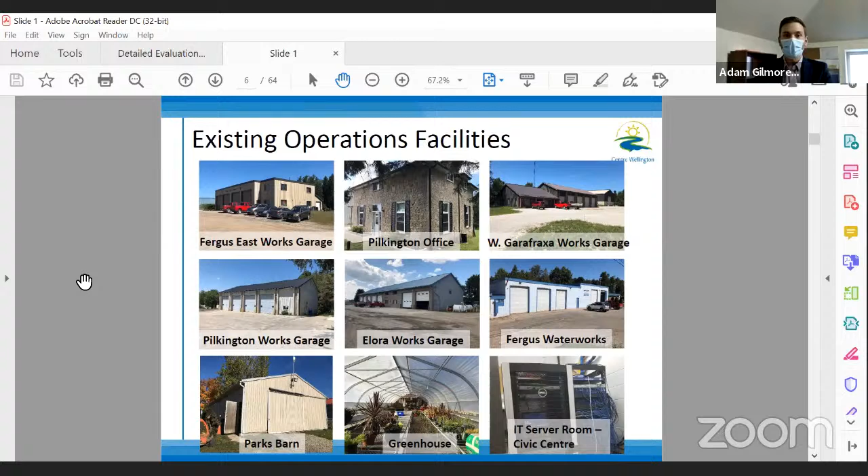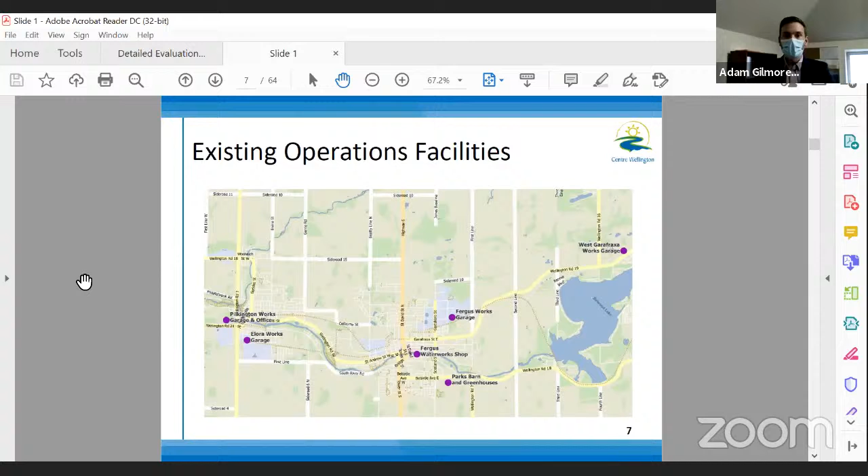So some of the current deficiencies and constraints that we have at these facilities: most of the facilities are operating over capacity, between 100 and 120% of space utilization. The current building designs, the use of space, the flow of employees and vehicles are not efficient or compliant with industry best practices and design trends.

The decentralized approach, this east-west spread, increases total facility operating costs because we have more facilities to operate and maintain. The facilities do not meet requirements under the Accessibility for Ontarians with Disabilities Act, or AODA, and they have health and safety concerns. Washrooms, change rooms, and lunch areas are inadequate for staff needs, and we have deferred maintenance and repairs such as roof replacements, garage door replacements, windows, HVAC, yard paving, security, fencing, etc. at these facilities.

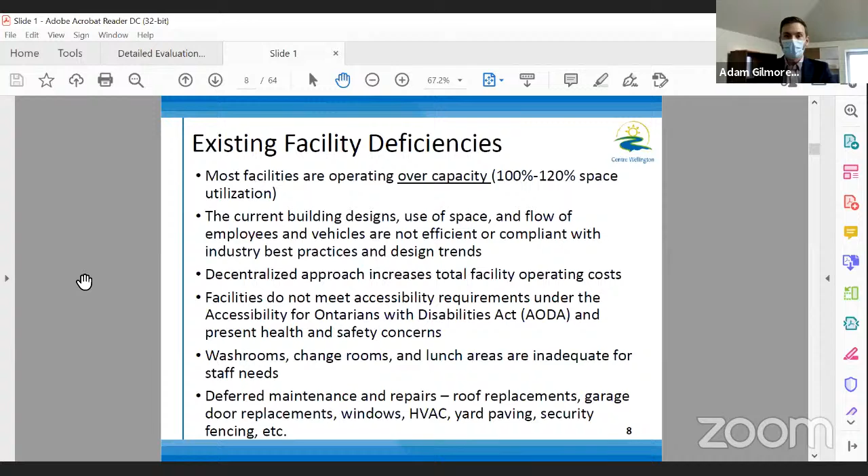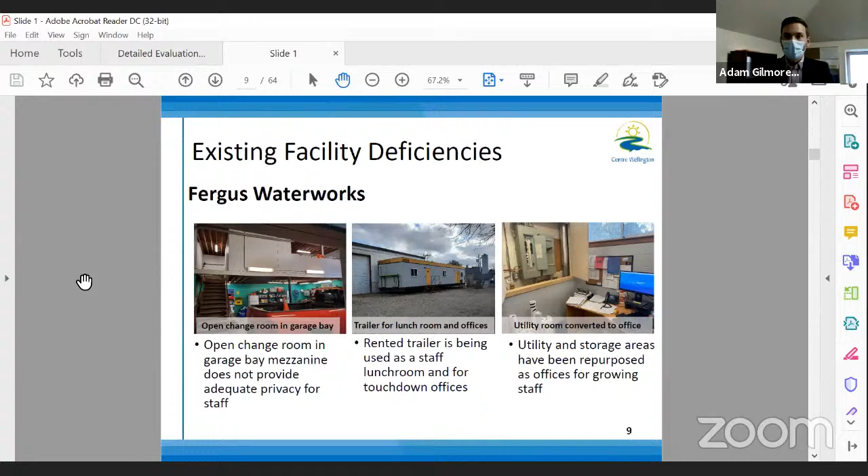I'm going to go through each of the facilities here and highlight some of the deficiencies at each of them. So the Fergus Waterworks facility - in the first photo on the left, you can see there's an open change room area in the garage bay, an area that's been retrofitted for change rooms in a mezzanine area that does not provide adequate privacy for staff. There's a rented trailer on site being used as a lunchroom and for touchdown offices, which speaks to the overcapacity issue. Finally, you can see there's an office space here that was a utility room but has been repurposed as an office area.

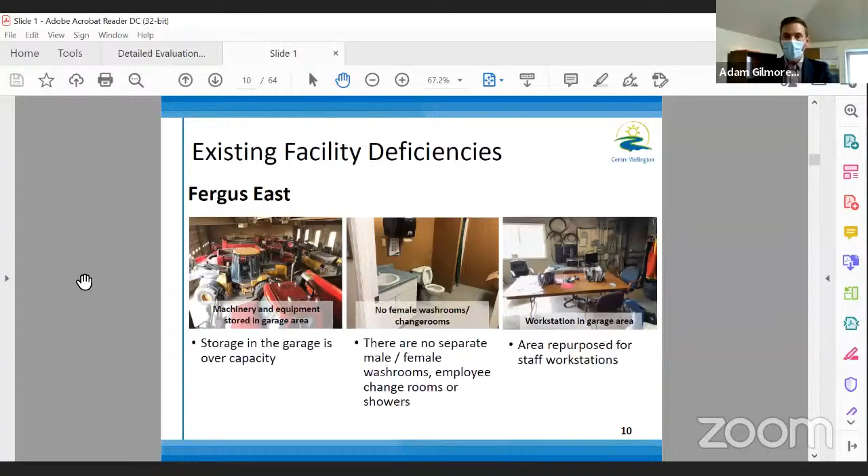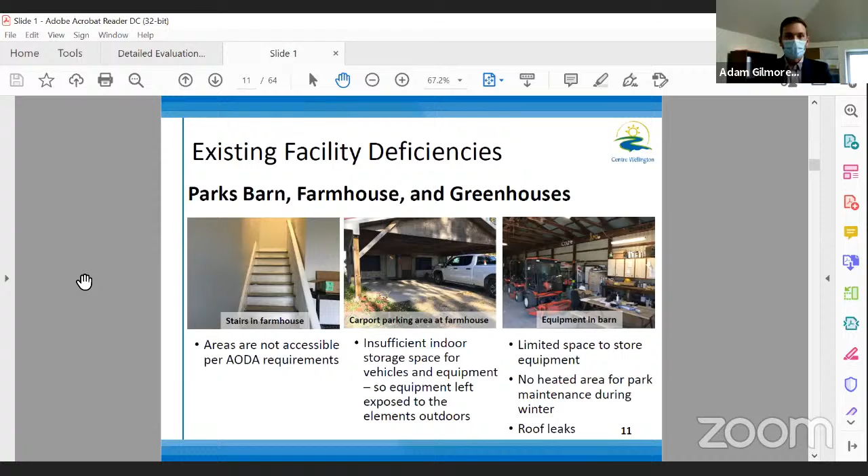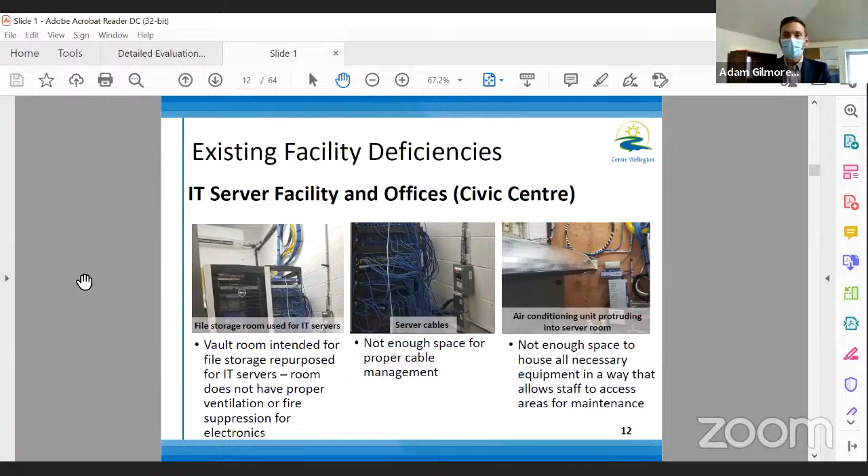Pilkington - the parking area and driveway is used for circulation of heavy equipment, but it's also used as a staff parking area. So there's a bit of a safety issue where you have staff walking across the parking area while heavy vehicles are traveling through that same area.

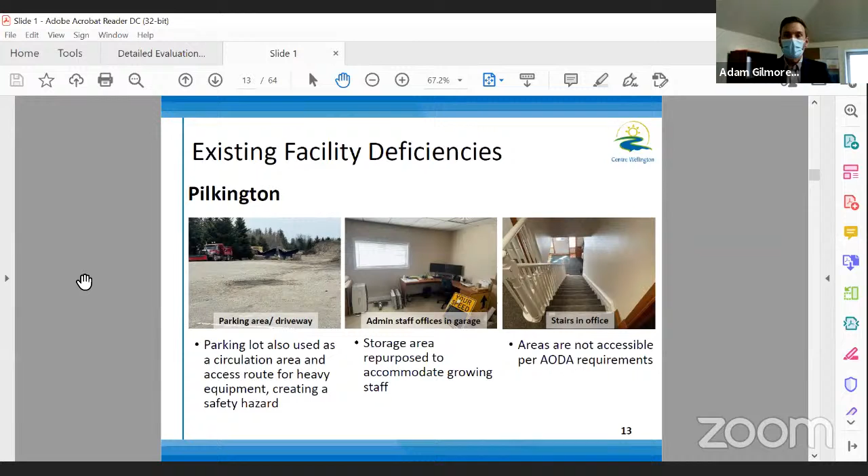Admin staff are in repurposed areas of the garage, to accommodate growing staff. Again, this is a common theme you'll see in most of the facilities: we have steep staircases, no elevator access, so not meeting AODA requirements.

In West Garafraxa, we have our file storage and archive area in the basement. It's nearing capacity, and to add additional capacity we would have to do major structural modifications to the building. You can see a staircase here, not meeting AODA, and finally a lunch area that doesn't have the required amenities for staff.

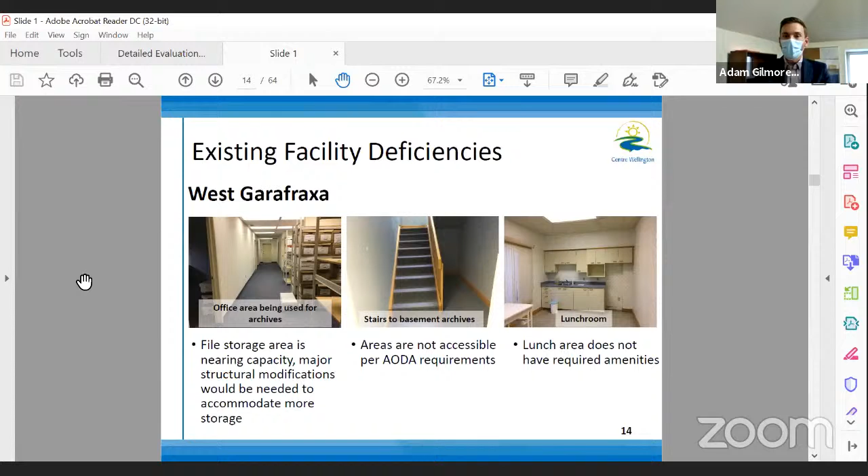In Elora, there's no proper crew meeting room, so an area has been repurposed for meetings. There's an open staff changing area, no proper male-female employee change rooms and shower facilities, and again the AODA issue.

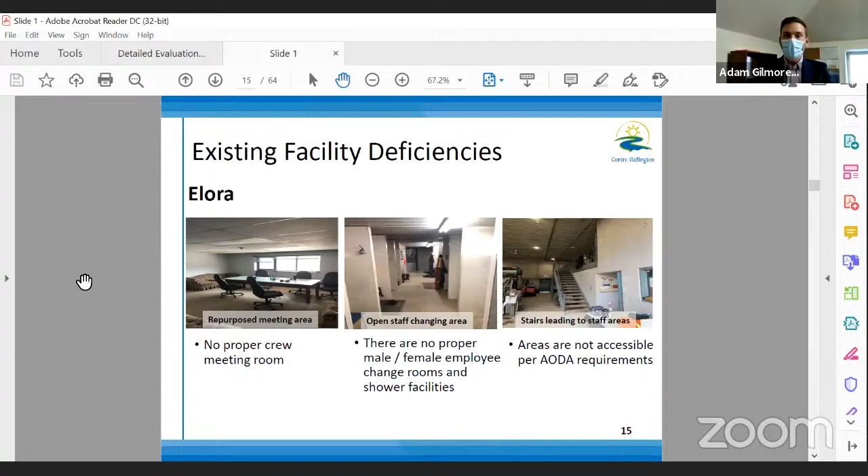To highlight how we're growing, under Wellington County's official plan we have growth targets to the 2041 timeframe. We're going to grow our population and employment by approximately 30,000 over the next 20 years. So we're going to need more staff, vehicles, and equipment to maintain our current levels of service for that growing population.

So the key point to summarize: current facilities are over capacity, not efficient or compliant with industry regulatory standards, and inadequate for staff needs. They're also costly to operate and maintain.

So I'm going to turn it back over to Colin to walk us through some of the history related to planning for an operations center.

Great, thanks Adam. So post-amalgamation, the township inherited a number of operations facilities. This included the ones Adam has shown in Fergus, Elora, Pilkington, West Garafraxa, and also a garage in Nichol as well.

Post-amalgamation, there was a study commissioned by the township that looked at a number of issues, including staffing, resource allocation, and also facilities. In terms of the operations facilities, the report recommended, and we've got it here in the presentation, that Centre Wellington should be aiming for a single operations depot within a 5 to 10 year horizon.

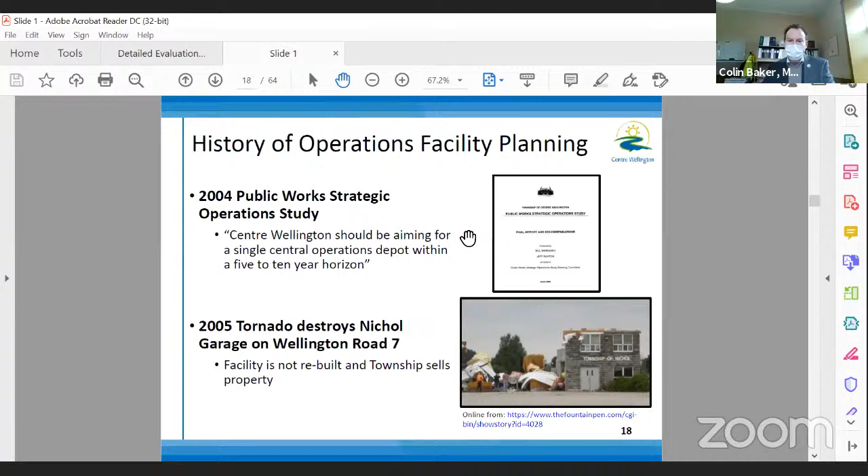In terms of capital budgeting for the operations center over the years, that centralized operations facility approach was included in various capital budgets and development charge studies over the years. And in 2018, the project budget was updated, as well as the project understanding.

Given the large geographic area of the township, it was determined at that time that satellite facilities to the west and to the east should be maintained, with a new facility centrally located in or around Fergus, specifically the Fergus garage site. This moved us from the previous approach identified in 2004, which basically said we're going to have one facility centralized, likely in Fergus, to moving from that centralized model to a decentralized model. That happened around 2018.

And so with that central hub and two satellite facilities, this decentralized model will improve efficiency of operations and significantly reduce travel times for operations and maintenance vehicles. During this time too, around 2017-2018, Parks and Recreation, outside services, information technology, and archives record storage were added to the project scope for the new operations facility.

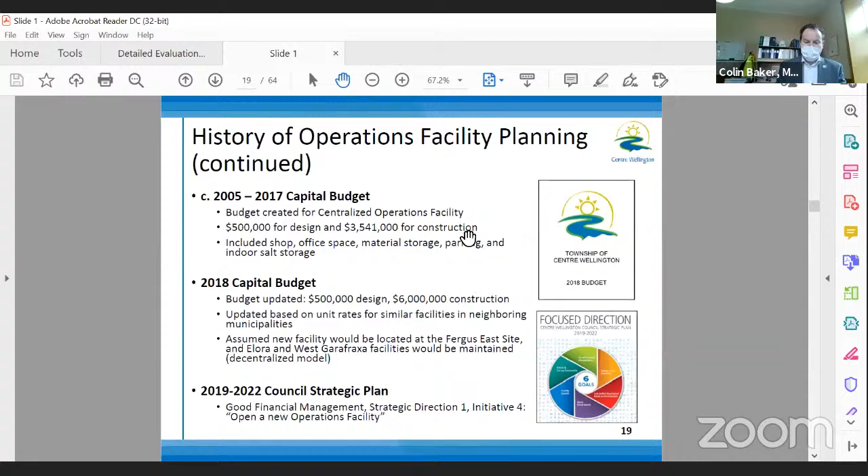Once that was passed, staff realized that we need to start moving forward with the strategic decisions related to the operations center. I've got a slide here that just shows typically what the 5 phases to a capital project are.

Really we look at a strategic phase, then a concept is usually prepared, and once the concept is prepared, we're into preliminary design, detailed design, and then construction. There are lots of steps in between or under those headings, but that's essentially the project phases. As we get closer to construction through detailed design, we're refining the project scope and getting a more accurate estimate of the budget. I'd just want to note that we're in the strategic phase still.

The strategic plan obviously provided us with clear direction, but we really need to understand how, as a network, all of our facilities will be working together, and overall what the plan will be.

We're still in this strategic phase, and I want to draw a parallel to some other studies that council would be familiar with that are similar strategic documents, like the water supply master plan, the transportation master plan, and also the asset management plan. These are bigger picture strategic documents approved by council that provide direction to staff.

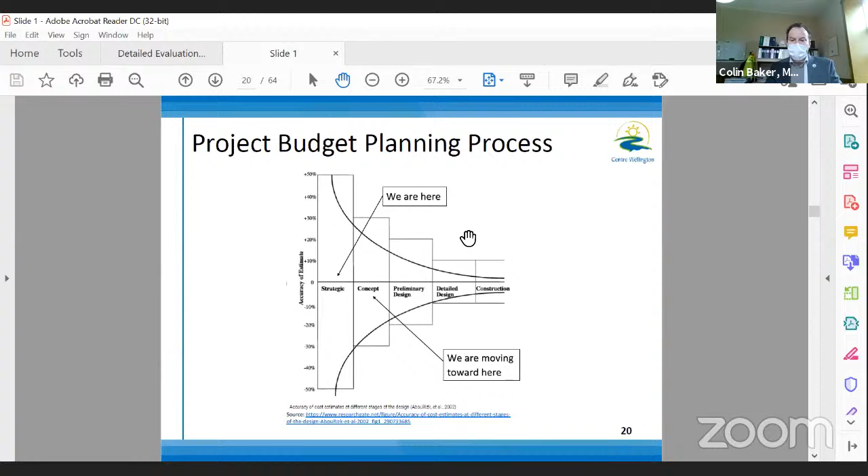On what projects to focus on, what's important to the community, and growing the community's infrastructure. So with council's strategic plan directive of opening a new operations facility, we had a lot of work to do to get to that construction phase. Staff prepared a scope of work and a request for proposals to determine operational space needs to house staff, vehicles, and equipment, materials to meet the community's needs to 2041.

Next slide. Now I'll hand it over to Stephanie and Adam. Steph will describe the project scope for the space needs assessment and concept design, and Adam will present the constraints around the Fergus garage site at 600 Glengarry.

Thanks, Colin. Yes, so we pulled together a request for proposals for the space needs assessment and concept design study, and that was issued to consultants in June 2019. That was based on some key assumptions, one of the primary ones being that we would be demolishing the existing Fergus East Works garage and using that existing site at 600 Glengarry Crescent in Fergus as the location of the new shop and offices for the project.

So we had basically earmarked Fergus East for demolition because, as we saw in some of the information Adam went through, Fergus East has several deficiencies. It does not comply with accessibility requirements. It is very overcrowded, and it's also one of our older facilities, approaching 50 years old now. Because of all of those ongoing issues with that garage, it really is nearing the end of its useful service life.

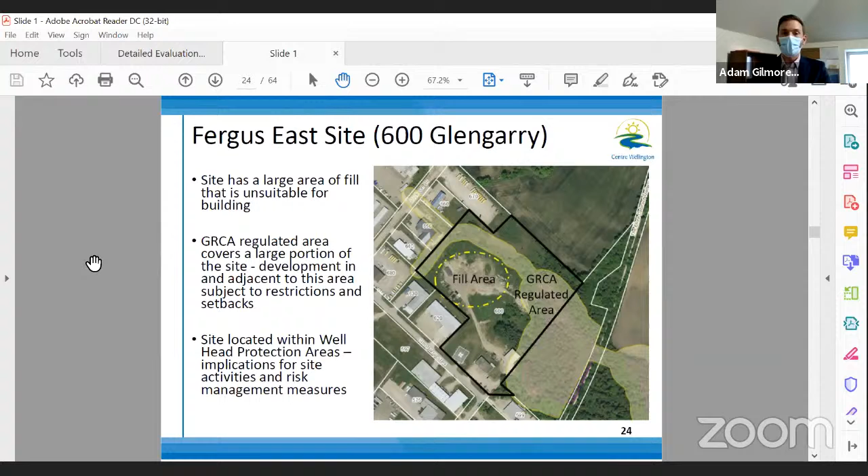So we did a very preliminary high-level conceptual layout for that site, and what we found was that the building we could fit on that site is not large enough. It will not meet our needs to 2041, and would not include a salt storage facility, pole barns, greenhouses, and other facilities we need. It would also be very expensive to construct given the need to prepare that fill area for construction.

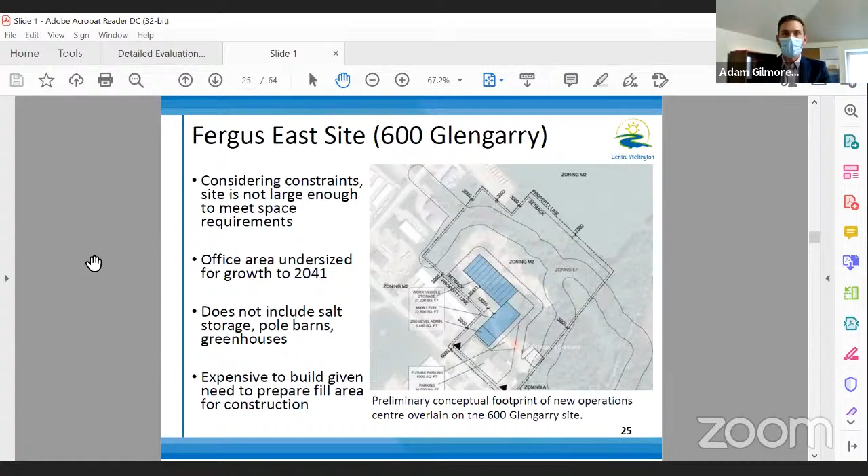Then in December 2019, there were some new options or ideas discussed at the council budget meeting: expanding existing facilities, coordinating with a county facility, and finally, utilizing the Queen Street medical offices.

The Queen Street medical office building in Fergus is owned and operated by the township. That building has been vacated by the doctors and medical staff that previously occupied it, so there is an opportunity to use that space for township staff office space. We wanted to also consider that in our analysis.

Our scope of work was expanded to consider these options. Between January and March 2020, 8 options were developed. Between March and December 2020, the project was put on hold temporarily due to COVID-19. In January and March of this year, the project was picked back up, and we subjected the 8 options to a detailed evaluation, coming up with a preliminary recommended option. For that option we completed a concept design, an implementation plan, and a financing plan, which we'll walk you through later in the presentation.

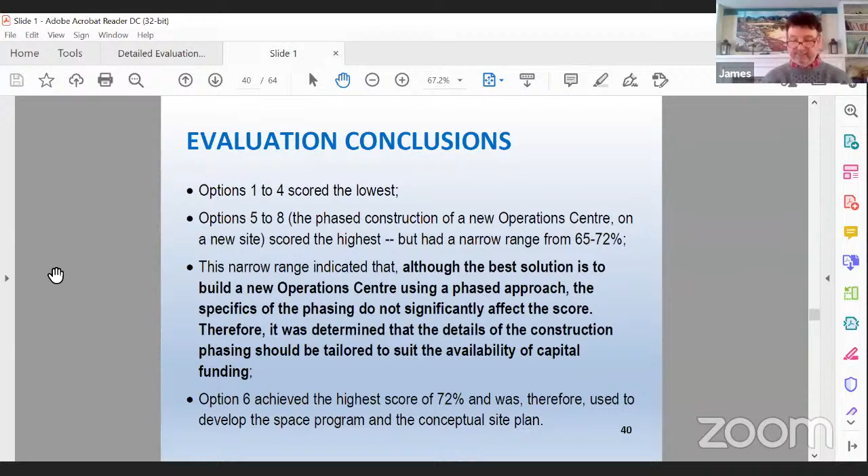And with that in mind, we moved forward through the study looking more closely at option 6. So option 6, I've talked about it earlier, but just to give a better description now that we've identified it as the preferred option.

Option 6 would be divided into 2 phases. Phase 1 would consist of building the full office for all of the office requirements for the next 20 years, as well as employee amenities, meaning lunchroom, changing rooms, washrooms, and so forth, as well as the shops and the vehicle maintenance bays. Some garage space would be built for immediate needs for vehicle storage, but otherwise those space requirements would be met for the interim by utilizing space at existing works garages.

And there would be one new greenhouse built in phase 1. Phase 2, when money becomes available, would be built. And at that time, the remaining garage bays would be added on, and a new greenhouse and salt storage building.

And once this building is complete, many of the other works garages would no longer be required and could be utilized for other purposes or even disposed of, with perhaps the exception of one or two works garages, which would have a longer term benefit as satellite facilities.

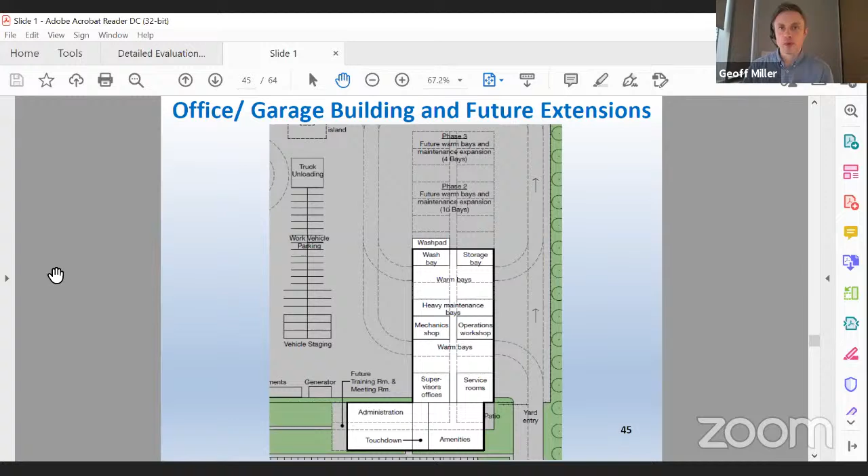The workshop wing can expand to the north, as shown with the dashed rectangle at the top, which indicates later phase expansion. And the administrative wing can expand to the west, what we'll call west in this generic plan.

Looking more at the overall works yard plan, fleet vehicle movements, as I mentioned, are indicated as dashed lines, and those are planned as much as possible as one-way loops in a counterclockwise configuration. We've found that those are seen as much safer movements in a works yard, as left turns are safer for larger vehicles, especially vehicles such as plows with wing blades, where right-hand visibility is very restricted.

We've mapped out most of the typical daily activities that would take place in this works yard. Those would include things like driving in and out of the vehicle storage and maintenance bays in the building, loading salt and sand indoors in the salt and sand shed that would be part of phase 2, that's the heavy dashed rectangle at the upper left of the page.

Loading various materials and equipment around different parts of the yard. Those are indicated in some of the labels, such as topsoil, gravel, various vehicle attachments and things like that, fueling and other miscellaneous activities.

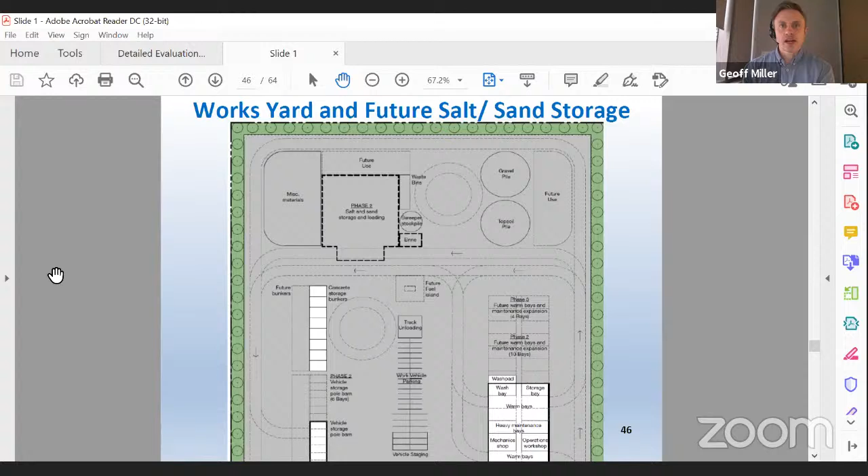In the south portion of the site, you see the main parking area, the staff vehicle parking area. An important feature of this plan is that there's no private vehicles entering the works yard itself. This parking lot would accommodate roughly 78 vehicles, including 60 staff, as well as 16 visitors and the required barrier-free spaces, and would allow for additional parking expansion of that same amount again in a future phase.

The small white building at the upper left is a greenhouse, and there's room to the south of that for additional greenhouse space in a future phase, as well as outdoor plant storage just to the left of those buildings for new trees and other plants. There's some adjacent parking for loading in and out of the greenhouse and plant storage areas.

The other key planning feature is having two site entries. That's important because, one, to have this one-way directional flow around the site as much as possible, but also if one of the entries becomes blocked by, say, a broken down vehicle or a material spill, the other one is available for both entry and exit.

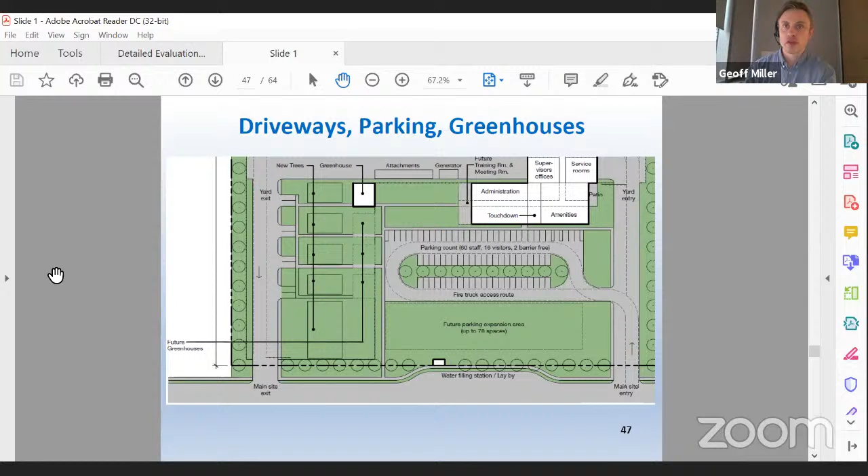Summing up, this plan gives us a really good visual validation of how much space the operations center requires. It clearly demonstrated to us that the Fergus East site is not viable in terms of the amount of space, and therefore 20 acres at a minimum should be purchased.

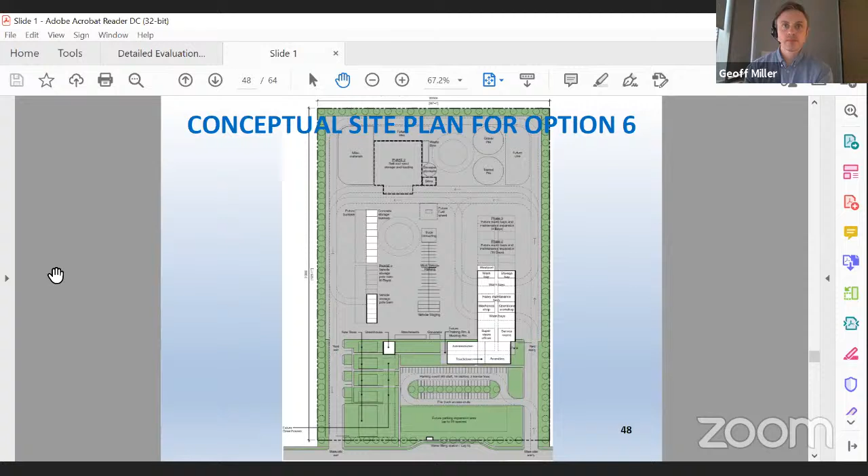These 6 projects were all built in the last decade, most of them just in the last few years, all in Southern Ontario, mostly in this region. Two of these are projects I'm intimately familiar with, as our office designed them: the City of Quinte Operations Center and the Town of Halton Hills.

Some of the variables that affect cost and size include the fact that smaller buildings tend to cost more per square foot, which makes sense with economies of scale. The different programs in these buildings can make a big difference. Cheaper space to build will drive down the cost per square foot, and cheaper space would typically include things like indoor vehicle storage, where the space may be minimally heated and quite basic in its construction.

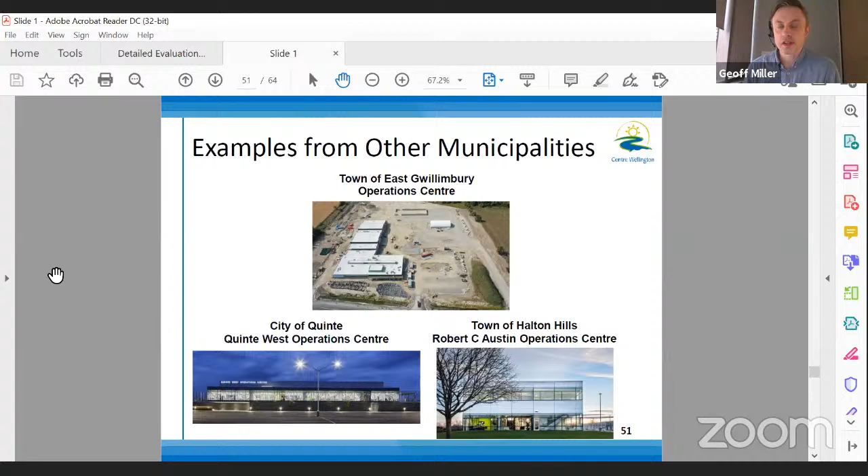Some of these photos, we hoped, give you a sense of just the kind of look and feel of what is typical in this type of building nowadays. They look very different than they did 50 years ago. The expectations, the level of finish and sophistication, particularly of a lot of the workshop spaces, has by necessity increased over time.

I'll just mention that these photos illustrate some of the aspects of current operations centers that are sort of current best practices in terms of design. I would say those things include better quality, safer workspaces than you would have seen a generation ago, particularly in terms of safety standards of workshops and yard layouts, but also amenities such as lunchrooms and change rooms, which contribute to happier, healthier, and more productive staff.